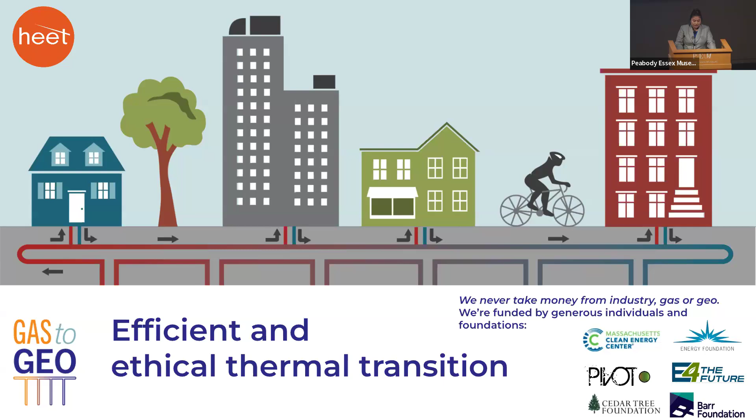So we're here today to talk about how we're upgrading our building energy systems so that they are more resilient, reliable, and efficient. But most importantly, how can we do this at the speed and scale that we need to meet our emissions reductions targets? To reduce emissions from the building sector, we have to meet the heating needs in our buildings with electricity instead of combustible fossil fuels. Over time, the electricity generated and consumed should come from energy sources that involve no combustion, such as renewables. The more efficiently we electrify our buildings, the less renewables we need.

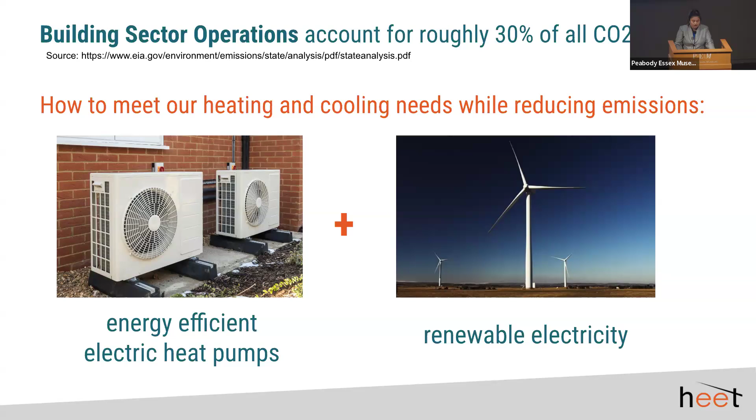So HEET has taken a hard look at our current energy systems, both gas and electric. So what will happen to our grid as we electrify? This is a graph of our current electric peaks. Currently, demand on our electric grid peaks in the summer when AC units get switched on. One thing to note is that our grid is sized to meet this peak demand.

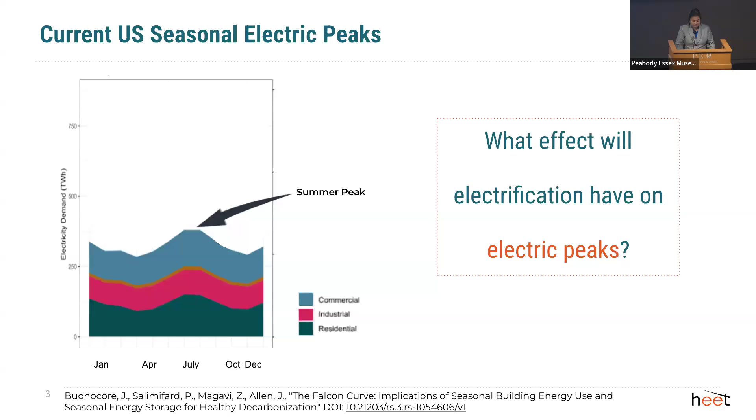Now, how will our electric demand change as we electrify heating? Well, the answer is it depends on the technology. This study shows the impact on the grid if overnight we chose a technology and electrified our heating demand. This exercise showed us that the coefficient of performance of whichever dominant strategy we choose will impact the size of the electric grid and the investments that we'll have to make to size that electric grid appropriately to meet the demand.

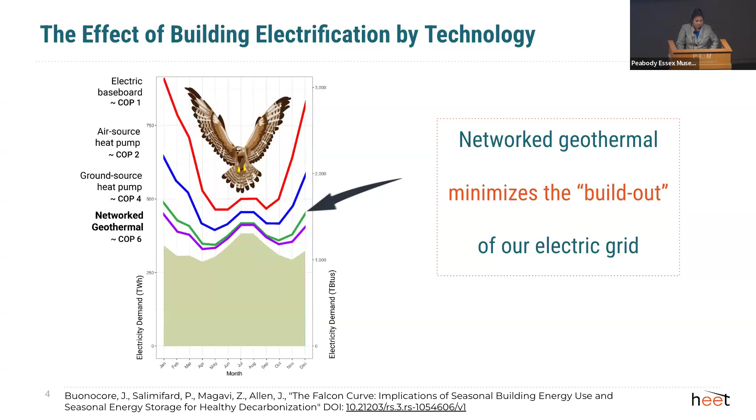In a study published last December by Oak Ridge National Lab, they compared mass deployment of air source heat pumps against ground source heat pumps. The results were consistent with the last study. A higher electric demand will not only be extremely hard to meet with just renewables, but also incredibly costly.

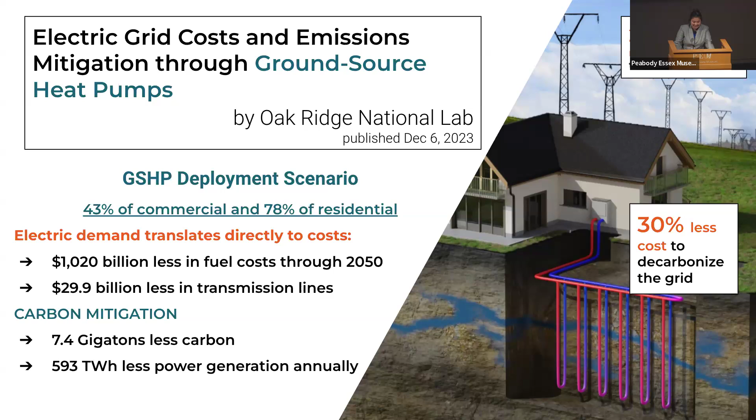If we decarbonize our built environment with a more energy efficient technology, in this case ground source heat pumps, we can expect to invest almost 25,000 less miles of transmission lines, which will cut our cost to decarbonize the grid by a third, which is a mega number. It's huge. So I say all this to say that efficiency matters.

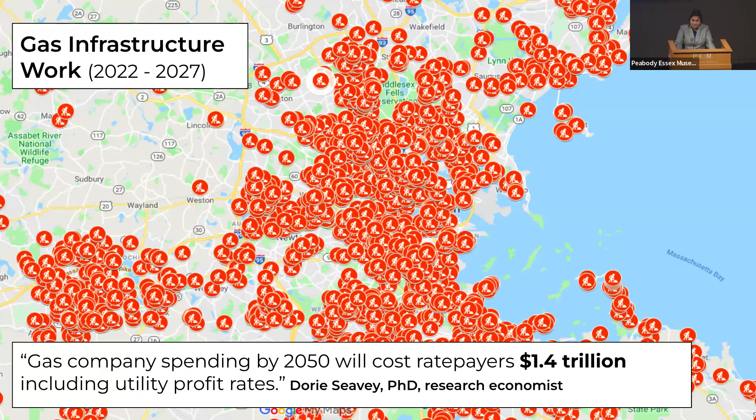But the pipes being installed now will be paid for by gas customers for over half a century. This means for decades after we stop using the pipes because of our state's emissions mandates and for the greater good, our children will still need to pay for them. This is the utility stranded asset issue.

Heat pumps are becoming increasingly popular, partly because they offer heating and cooling. They're now outselling gas furnaces across the country. As homeowners with disposable income transition to heat pumps individually, that leaves fewer gas customers, but that gas system hasn't gotten any less expensive. So each customer leaving the gas system increases the cost for the remaining customers.

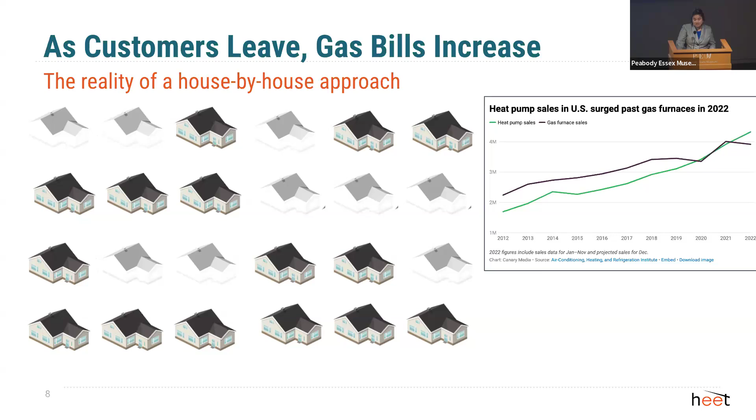At some point, heating with gas will be more expensive than heating with air source heat pumps. And after that, customers will flee fast. And in the end, the only ones left on the gas system are those who can't afford a new heating system. And that is not a just transition.

The shared water loop interconnects with vertical loops that are placed in boreholes going just a few hundred feet down. The heat pumps are in each building. The loop is filled with just plain water, making them safer for customers and for workers. And all the components are readily American made. And it's a closed system, thus there's no risk of contamination.

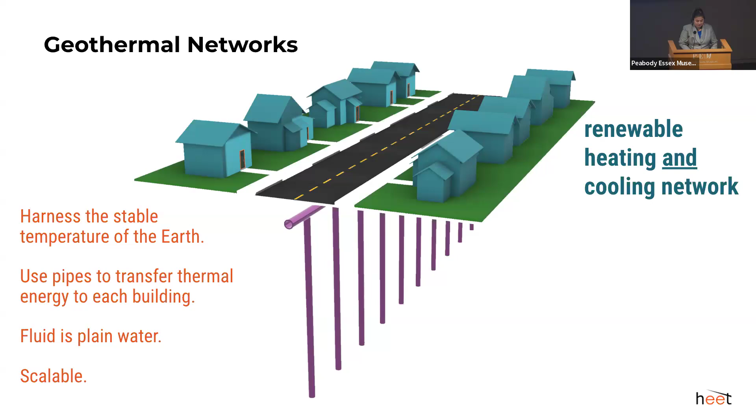Gas utilities have the customers, the right of way in the street, the expertise in pumping thermal energy through pipes underground, and they have the financing mechanisms to spread the cost of this infrastructure across all utility customers and over decades. So it's not too much for any one of us, and it's accessible to all.

It doesn't matter who down that street can afford an air source heat pump or not, everybody would get renewable energy, renewable thermal. So this is a non-intermittent renewable that would provide stable energy bills because it's locally produced and available all the time. It's also resilient to weather catastrophes because the infrastructure is underground.

So HEET proposed a merged gas geo rate base where we could decarbonize not one building at a time, but whole neighborhoods at a time.

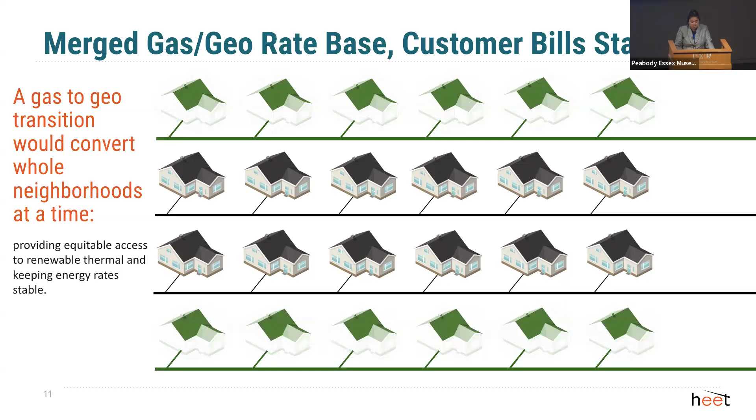Now, the term geothermal or geo can be somewhat confusing because it describes a number of different technologies. I like to think of it as a last name in a family with lots of different individuals that are all unique and different. So we're not talking about super deep hot rock geothermal power plants or still pretty deep hot water geo districts. What we're talking about is closer to a geo building where you have a ground source heat pump and some sort of loop in the ground.

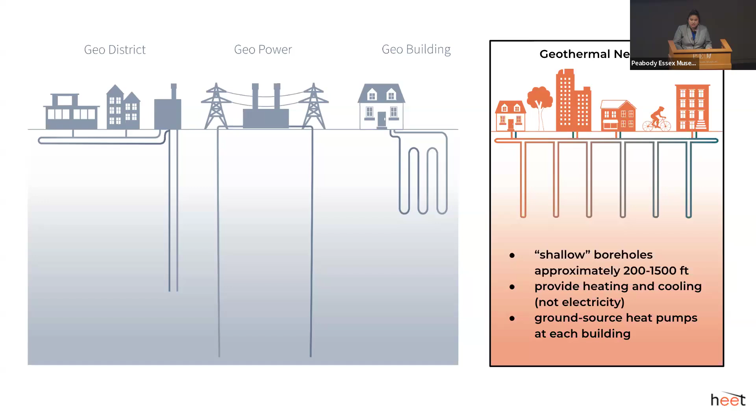It can be vertical, it can be horizontal. But instead, network geothermal uses all of the existing components of a geo building, the loop, the heat pumps, but configures them in a new way to maximize efficiency.

Networked heat pumps have advantages. Imagine an office building with the heat from its computers humming all the way through the winter. It's going to be rejecting heat into that shared loop of water. The horizontal loop making the water hotter. And then that heat can be used in homes down the street.

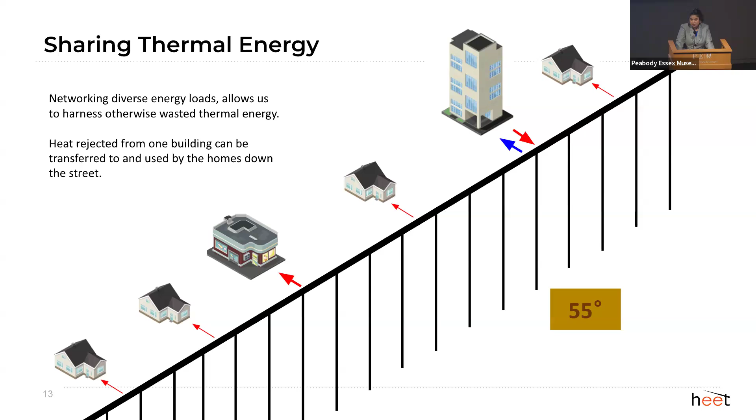The thermal energy, the thermal waste, is being harnessed by the main loop, which increases energy efficiency. That's energy that we don't have to create.

The vertical components of the system, the boreholes, are anywhere from 200 to 1,500 feet in the bedrock. In the summer, when the homes on the shared loop are all in cooling mode, they will reject heat into the loop. And that heat will move into the bore field. The thermal energy or heat will move outwards into the bedrock and be stored there. This heat can then be extracted by the same method, but in reverse, during the heating season.

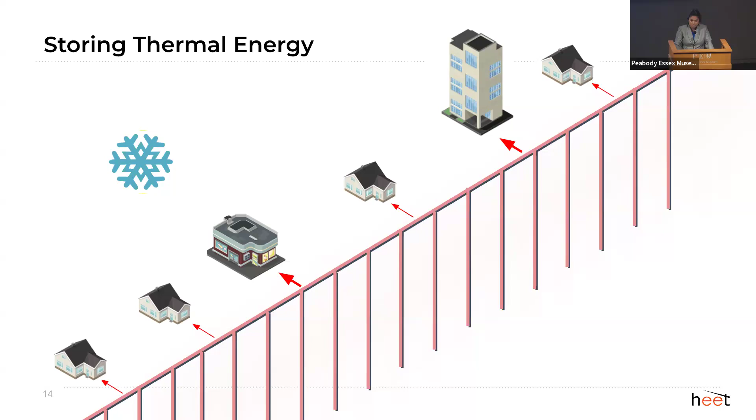So this thermal storage, seasonal thermal storage, has increased efficiency as well.

So a quick review of the benefits of these systems, some that I mentioned. A geothermal network can help meet the speed and scale that we need to meet critical emissions reductions targets, while minimizing the impact on the grid and therefore the cost to build out that grid. It gives us a plug-and-play solution to avoid investing in more gas pipe.

Since the pipes contain only water, it is safer than natural gas. This will also reduce the risk associated with single-point failures of the gas system, which can leave people vulnerable or even potentially lead to disasters like the Merrimack Valley gas disaster in 2018.

The cost of the fuel for gas systems is about 50% of your heating bill currently. Removing fuel costs will decrease dependence on fossil fuels and the global fossil fuel markets, which can be quite volatile, providing more predictable and affordable energy bills.

Because there is zero combustion associated with network geothermal, the air pollution in our homes from gas furnaces will decrease, providing healthier indoor air.

The system also provides cooling, an added and crucial benefit, seeing as heat waves are increasing in frequency and can increase the risk of mortality for vulnerable populations such as the elderly, children, and individuals with pre-existing health conditions. Additionally, since the infrastructure is underground, it's resilient against flooding and other climate catastrophes.

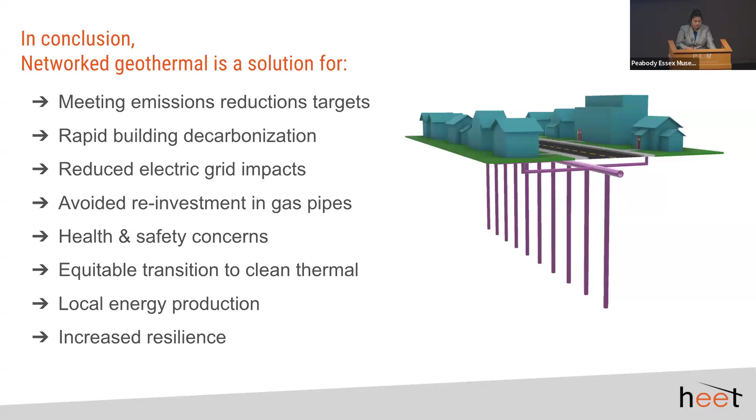A critical component of that consideration is keeping gas workers in their jobs. Everyone deserves safety, and the gas HDPE pipes installed today are exactly the same as the water pipes needed for geothermal, allowing the existing gas workforce to transition and giving us a good place to start from.

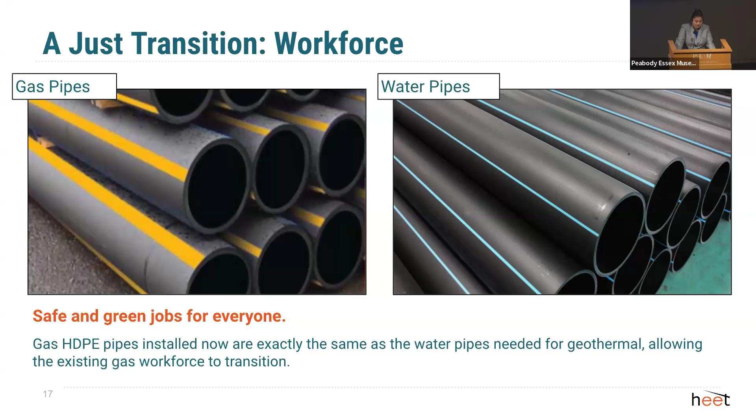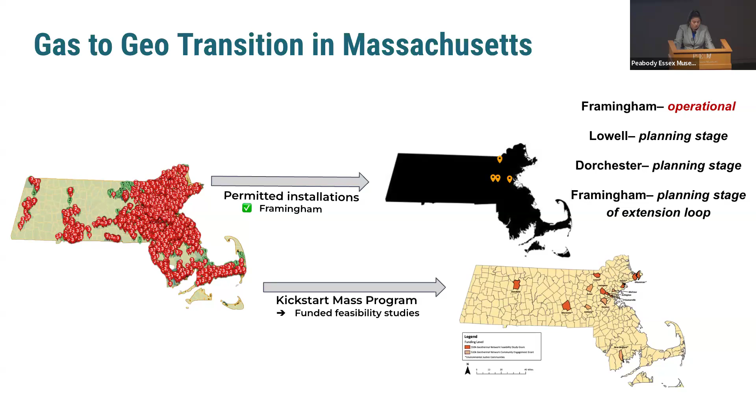Here's a snapshot of the gas to geo transition in the Commonwealth. There are 4 installation projects, one of which you'll hear about today. 3 are in the planning phase, 1 is operational, and 12 communities are building stakeholder buy-in locally and conducting technical feasibility studies. One of them is in your very own backyard, St. Peter's.

Episcopal Church. You have great champions in Achieve Renewables and Reverend Ives, so if you're interested in being part of a geo network, you can either scan this code or reach out to me directly, and I can put you in contact with those folks championing in Salem. Thank you.

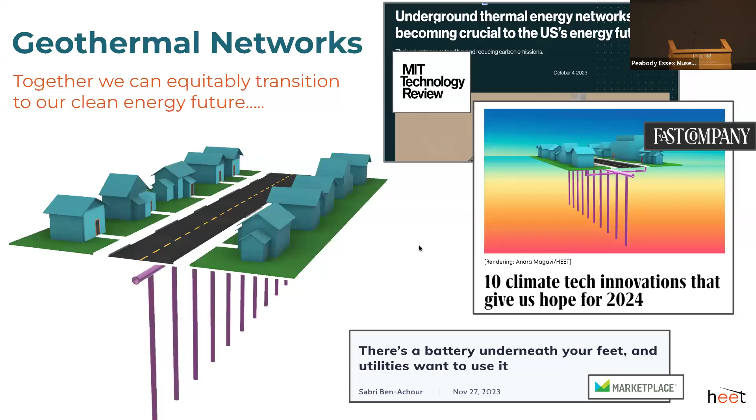Good afternoon, everyone. Again, Ruairi O'Mahony. I'm the Executive Director of the RIST Institute for Sustainability and Energy at UMass Lowell, and also serve as Senior Advisor for the UMass System and President's Office on Climate, Energy and Sustainability.

I will say we're massive fans of HEET. As you heard from Angie's presentation, they're a fantastic organization, and we've been very lucky to partner with HEET over the last number of years on a number of initiatives in addition to the Lowell Network Geothermal Pilot.

Just a quick bit about the RIST Institute at UMass Lowell. Everybody asks us what RIST is. They always think it's risk, which is ironic given that we're talking about climate change.

But we were very fortunate to have an alum from UMass Lowell, Brian Rist, graduate from our business school in the 70s, and go down to Florida to work in the construction industry. One of his first projects, I don't think he would have felt fortunate at the time, was destroyed by Hurricane Andrew. So he developed a company now called StormSmart, the largest global company that dissipates the impact of increased climate activity in the construction industry.

So when he came back to UMass Lowell and saw the work we were doing in the energy, climate, sustainability space, we were very fortunate to receive a donation to set up this institute and allow us to advance our efforts. So the RIST Institute comprises what were formerly 3 distinct entities at UMass Lowell.

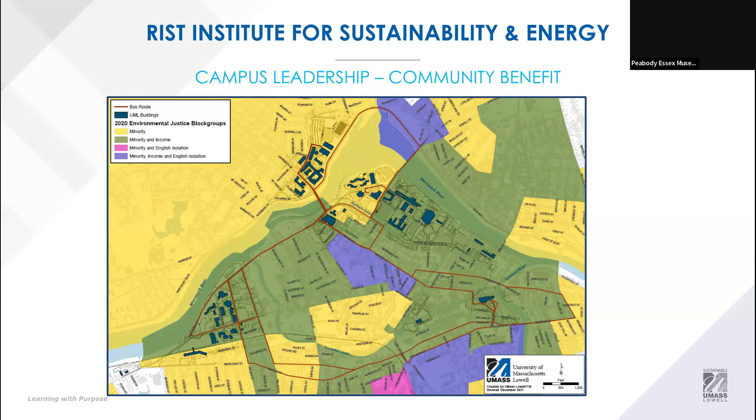This slide may be a bit hard to see, but it gives an idea of how we approach this type of work. The blue shaded areas are UMass Lowell buildings, and the red connecting dots are our primary transportation network across Lowell, overlaid on an environmental justice map.

Like any college or university, we have our own climate commitments and carbon reduction goals, and we're well on track to meeting them. But at the end of the day, what does it matter if the community we're part of is dealing with the worst impacts of climate change and increasing cooling degree days? Catherine mentioned a lot of the environmental justice issues present in some Lowell communities. So we have a responsibility to work hand in hand with the community we're lucky to be part of, to develop shared and equitable solutions. This is really important for us as we consider the type of projects we try to deliver, not just for the campus, but for the community.

Lowell is a great example of a gateway city navigating this next transition, addressing the climate transition in a fair, just and equitable manner. What we want to do is develop scalable and replicable solutions. As Angie mentioned, this is a pilot. Our hope coming out of it is that we have a playbook that our communities can follow, so we can rapidly accelerate this transition, because there's so much at stake here.

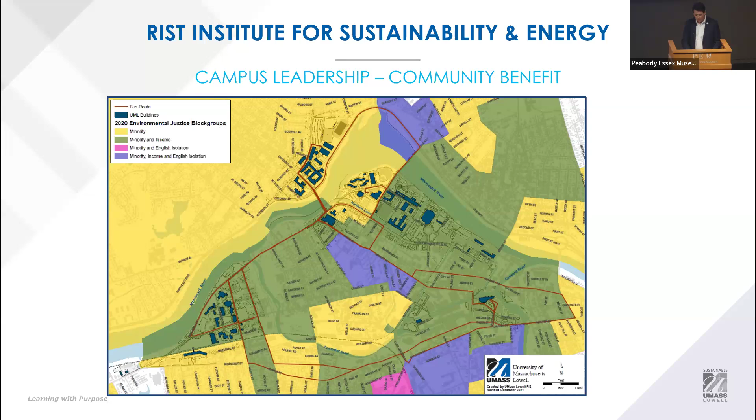A bit more on the specifics of the project. As Catherine and Angie mentioned, there was a rate case filed to enable these pilots. Like everybody in the room, we follow activity at the State House and federal level very closely. So when we learned there was a pilot potential in National Grid territory, I'm not ashamed to say we lobbied hard to get it in Lowell. It was very important for us.

Maybe three years before we got into specifics on this project, we were working with National Grid and our legislative partners to make sure they'd realize Lowell is a great location for this. We were fortunate enough to submit an application in partnership with Catherine and her team at the city, and luckily selected as the site for the National Grid pilot.

What you see here is the actual project area. Through countless meetings with engineering teams, National Grid and HEET, we structured this to effectively utilize the university's property as the well field for this system - we felt it was the most efficient way to do it. Now, DCAMM are great partners for us, but a lot of these parcels were in different DCAMM ownership areas, so we had to do a lot of wrangling and back and forth with DCAMM to get the permitting and legislative actions approved to allow us to utilize UMass property for this work.

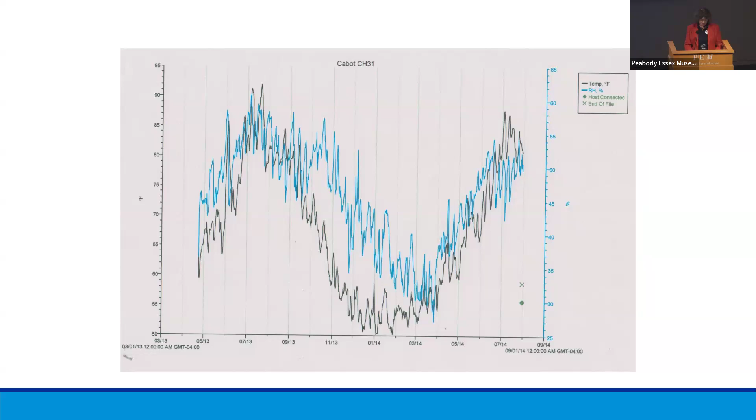So this was originally part of a much larger project that involved an addition, the removal of the existing building in the back, and the building of a new addition. During COVID, we broke out this part of the project because of the ventilation issue. So we repriced the project in 2021, raised the funds, and then went out for final pricing in the spring of 2022.

The pricing had gone up more than 20% in about 6 months, so we stepped back and raised more money. Then we repriced it again in the fall of 2022, and it had gone up again. But it was clear the pricing was not going to change for the better in the near future, so we decided to go ahead anyway. We didn't consider the rebates from National Grid at the time because we did not want to rely upon them.

The Commonwealth of Massachusetts holds a restriction on the exterior of the Cabot House, and CPA funding required approval from the Historic District Commission. I work in Beverly and live in Boston, and both communities have CPA funding. If you live in a Massachusetts community that doesn't have a CPA, do whatever you have to do to get it. It is absolutely worth all the trouble and work the campaign takes, because it is transformational in terms of funding for historic preservation, and this kind of project qualifies for historic buildings and organizations because it protects historic fabric.

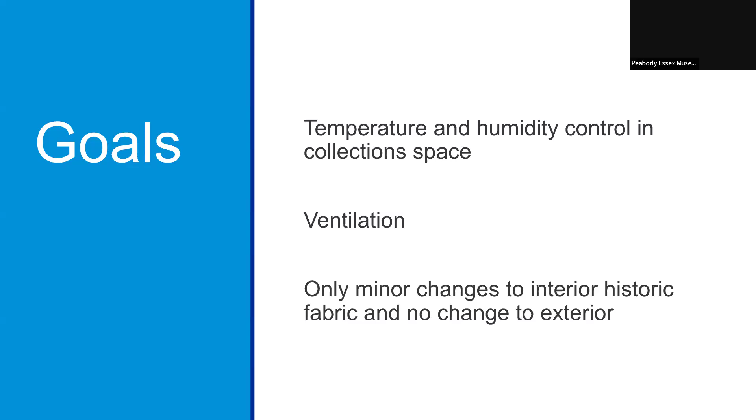We knew utility costs would increase for us, and we couldn't do anything about the lack of insulation in the walls. Those of you with historic structures know there are limited ways you can insulate buildings like that. But we did put in a brand new roof and insulation in the attic, which we are hoping, particularly in the winter, will make a big difference.

No one wanted to be in our building in the summer or in the winter, including us. We had inadequate heat, we had portable AC units, but they weren't that helpful. So several months of the year, the environment wasn't conducive to on-site programs or research, which is also a big part of what we do.

We were missing opportunities to attract visitors, and we were also missing opportunities to raise funds. We were worried, and still are, about the increase in utility costs with this change. Heating and cooling costs for our three properties are a significant part of our budget. But we knew we needed to improve the capacity and efficiency of our systems, and our mission says that we need to protect our collections. We have only been fully operational since April, so the cost changes are not known to us at this time, but we'll know a lot more in about 8 months.

We had raised $500,000 from private funders for that original larger project. We ended up using almost all of it for this because of the significant price increases, with the permission of the donors. We received $200,000 from the Mass Cultural Facilities Fund, and $175,000 from Beverly's Community Preservation Act funds. That's a really big contribution to a project of this size, which is about 1.2 million total.

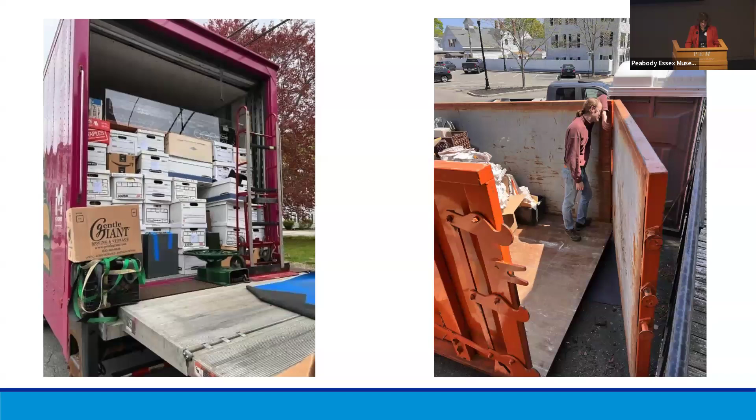We had to move almost everything in our building, and much of it had to move off-site. For those of you with collections, we had an arrangement to rent locally that included an agreement not to reveal that we were tenants, so that there would not be a risk to our collections.

Larger objects were grouped in the center of the rooms to start and shifted when necessary. Everything was protected with multiple layers. And even though we're a historical society, we love to throw things away. We filled 4 dumpsters with stuff that should have gone years ago, including broken exhibit components, and we recycled many outdated electronics. That's Jonathan.

We had the most incredible staff and volunteers, and it was really hard work, and he really did feel like that that day.

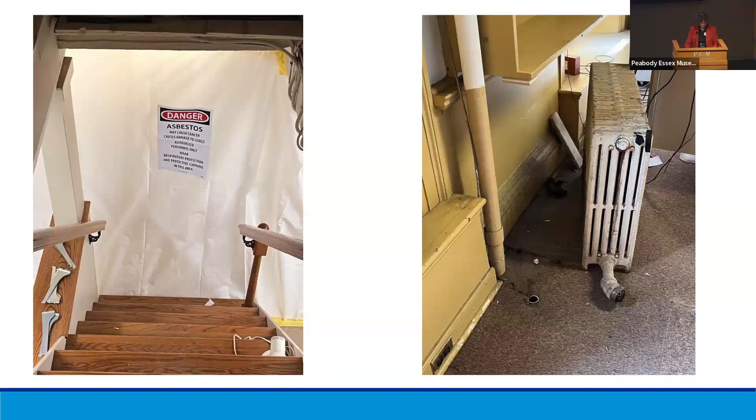We had to remove both asbestos and many old radiators and pipes. On the left is the stairway to our basement space, which originally held our transportation collection, which was largely archival. That area now holds ceramics and glass and the papers.

We moved up to the 3rd floor. The abatement crew was not only terrific, they videoed the process for us because we were not allowed into the space, so great for social media.

The remarkable impact of the cross ventilation in the summer of 2023 did make me question why we were putting air conditioning in the first place. It was the most comfortable the building had ever been because we essentially had all the windows open all summer long.

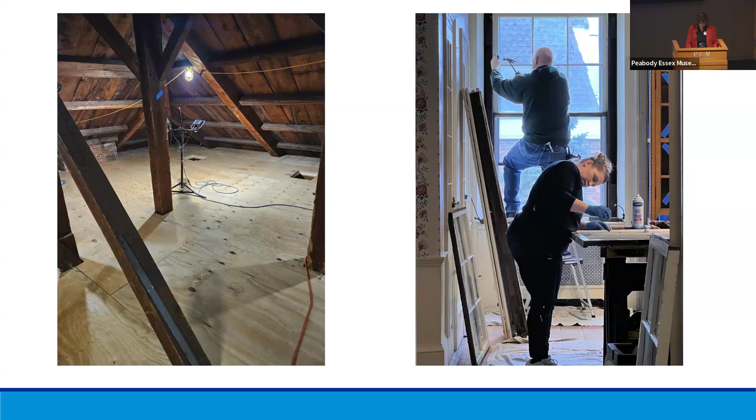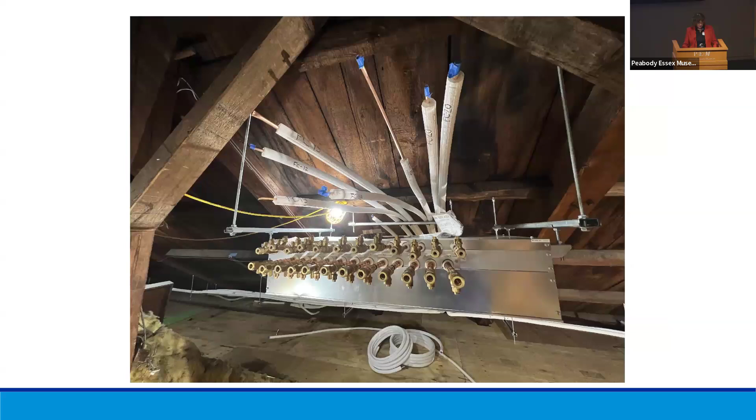The two guys from Breen and Sullivan who installed this system must have been gymnasts in a previous life, because they had to get into these incredibly small spaces. I really don't know how they did it, and it was just remarkable.

The biggest challenge we faced was that the planned HVAC design wouldn't work. The engineers used the extremes of the specs, like maximum pipe runs, and assumed everything would be fine. When the installers saw it, they asked for a meeting with us and said they thought it was unlikely to work as planned. They also said this happens to them a lot.

Always listen to the people who are doing the actual work.

We did work with them to come up with a solution, but it took quite a lot of time. We were also adamant that we did not want water introduced into the historic Cabot House for the humidity control—we must have said that a dozen times. That was ignored, and the proposed solution brought water pipes into the Cabot House. After much wasted time, we pulled that part of the project out of the scope and figured it out ourselves. It appeared afterward that they didn't want to argue with us because they disagreed with us, so instead of having the conversation and reaching a conclusion, they just went ahead and designed something that contradicted one of the most important things we were saying.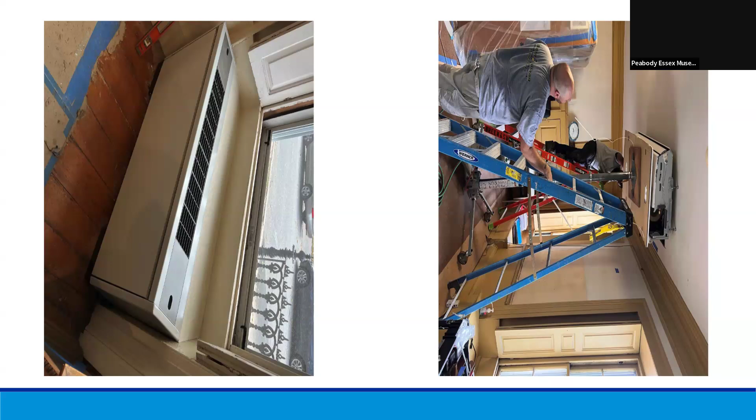The units in the historic rooms were fed from either above or below, so we needed to box in the piping. We were thrilled with the quality of the new trim, which complements the historic material but is clearly distinct. You may not be able to see it, but it's wonderful. We spent a lot of time on this, and we're very lucky to have a superbly talented carpenter who did it for us.

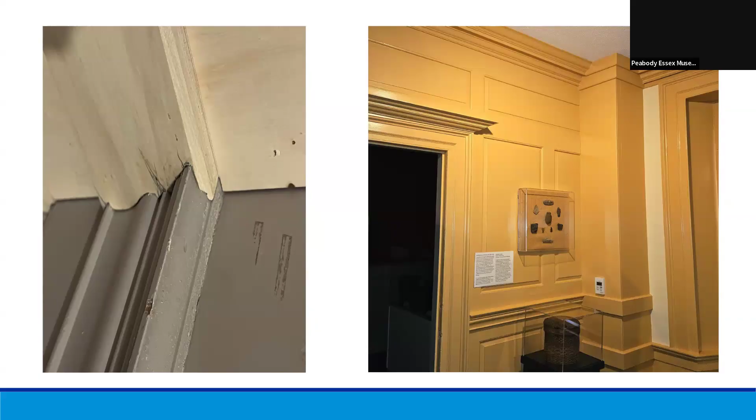One major holdup was our reliance on National Grid to upgrade the service. They were not at all responsive, and when they were, they actually contradicted each other, particularly about who was supposed to go first, the contractor or National Grid. I finally contacted a community relations person, and we got a response after a month. My contractor told me he had projects that waited far longer than a month to get a response from National Grid.

Our biggest setbacks came because both compressors failed almost immediately—the first just as the system was coming online, and the second about two months later in the middle of winter. I learned from the installer that when the systems are assembled in the factory, they don't include a filter because it's a closed loop, but the installers now add a filter every time a compressor fails, which is what they did for us, and they've both worked beautifully ever since.

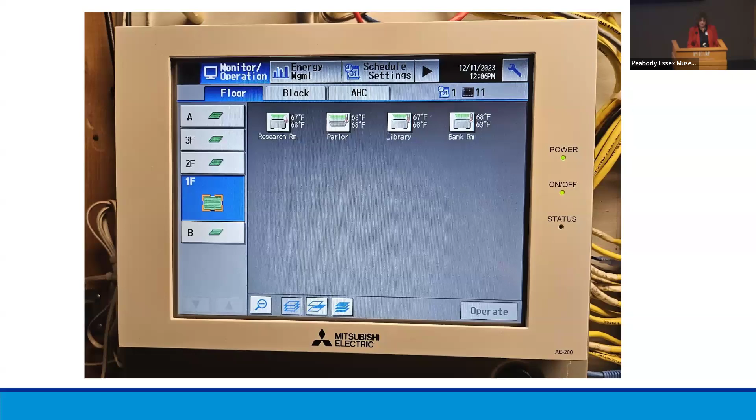Most of the time, the system operates beautifully. We've had to touch it maybe 2 or 3 times. When we have a very large group of people in the building, we need to tweak it a little, but it's really been great. You probably remember that this July was about the hottest month we've ever had—we would absolutely have had to close under our previous circumstances. I've gone around several times telling people, 'You're taking this for granted.' We're already taking all this for granted, that we're so lucky to have had this really comfortable summer.

So the rebate, this was a lot of work to apply because I couldn't apply, the contractor had to apply. It took a lot of nudging and reminders, but it was worth it. We did need to correct several things in the original application, but the support staff from National Grid was really great. Once the application was accepted, we had the money within about 30 days. So it was definitely worth it to us.

And what it allowed us to do was some of the aesthetic improvements we needed because of the work we had just done. I should also say that the guidelines change on those rebates, so if you're going to go for one, check when you're doing the project to make sure it's what you need.

In conclusion, everyone we worked with was great, but in particular Breen and Sullivan, as I mentioned before, and Deulis Brothers were remarkable. They put up with a lot from us, and they seemed to really care about the place. I'll end where I began: I can't answer any technical questions, but I can connect you with people who can, and I would love to give anybody who's interested a tour. Thank you.